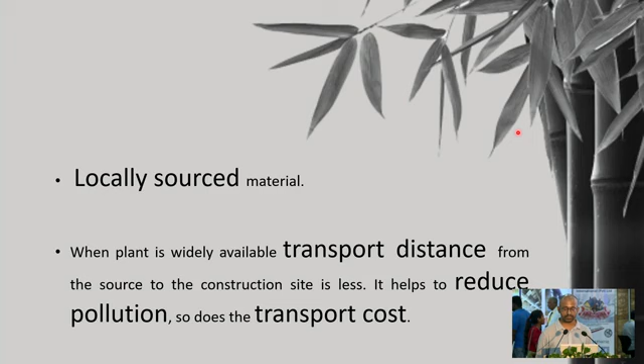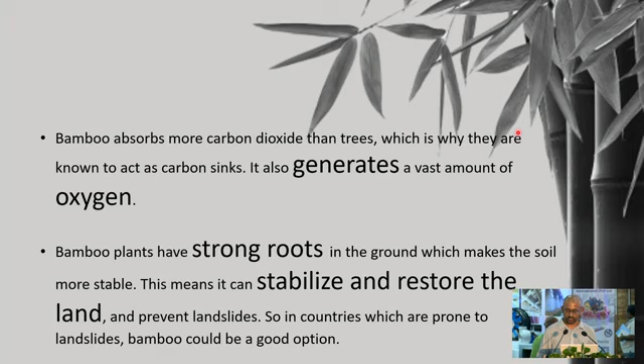And the plant grows naturally. So anyone can grow it. It doesn't need pesticides or any complicated chemicals or anything. So anyone can understand the process. It's locally sourced. You don't have to import the material from other countries, which makes it a very green material. And because transport distance is less, the cost is also less, and also the pollution is less. It also generates a lot of oxygen. It absorbs carbon more than other trees, so it acts as a carbon sink as well. And with the strong roots, it's good to stabilize soil and restore the land. So it's good to grow in landslide-prone areas as well.

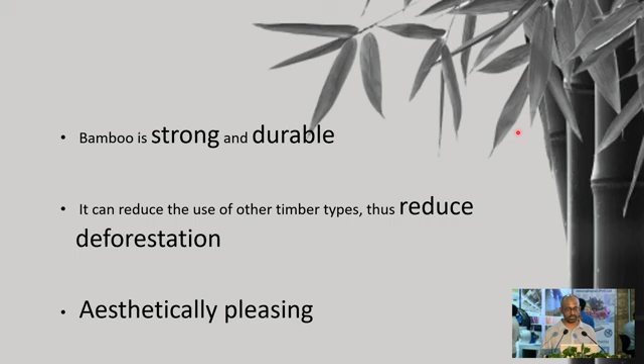It's strong and durable. When we use bamboo, we don't have to cut other valuable trees. So it can eventually reduce deforestation. And buildings in bamboo are quite different from other buildings, so it's aesthetically pleasing. The construction techniques can be easily learned. We already have good climatic conditions in our country to grow bamboo. So there is potential to grow this as an industry.

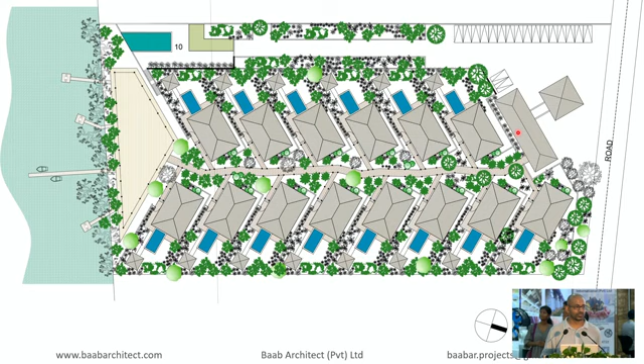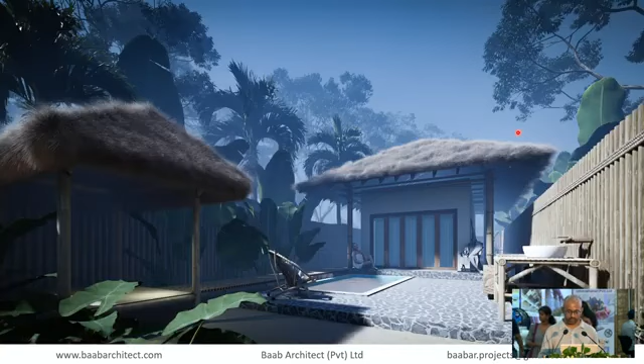So this is a bamboo hotel I got in 2017, and it was a 14 chalet project in Trincomalee. We designed the project and we proposed the building to be constructed out of bamboo, but the project never realized. But from there, even though we proposed bamboo, I didn't know bamboo construction, so I wanted to learn bamboo, and I looked for professionals to learn about bamboo, and I hardly found anyone from Sri Lanka. So I went to Bali in 2018 to learn bamboo for 10 days. And again, this is the chalet, and some 3D images of the same project.

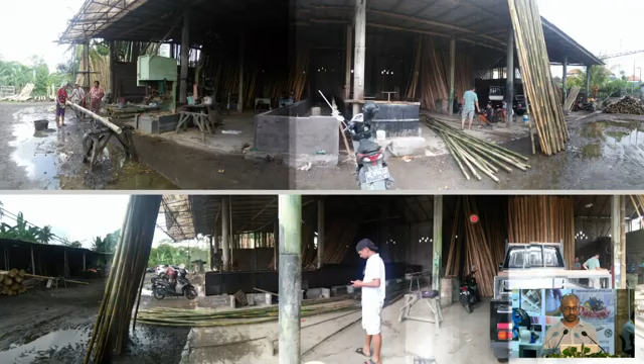And this is a treatment plant. It's not very complicated. It's just a simple shed with 2 tanks. You have a masonry tank and a steel tank. In the masonry tank, you keep the bamboo for about 1 or 2 weeks, 1.5 weeks sometimes, and you add boric acid mixed with water. You just sink the bamboo and keep it. It's very simple. After that, you put it into the steel tank and heat it up for about 3 hours. And that's it. After that, the termites won't attack. It's safe. The glucose is toxic, so the termites won't come. So you can use it for construction.

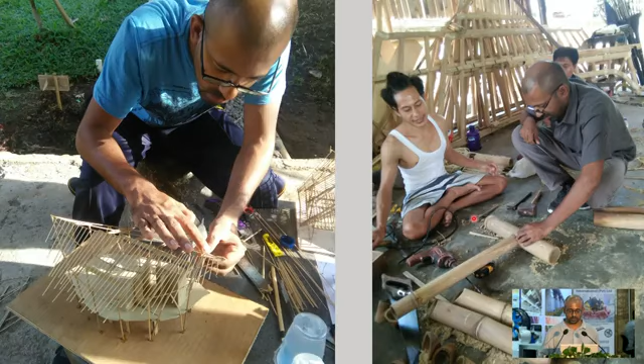So these are some workshops, and bamboo model making is also very important for architecture students and architects. It's very important to work with models if you do bamboo construction, because they hardly use drawings at site. They always use the model. There's a model they keep at site. They have a small ruler made out of bamboo itself. They take measurements from the model and do the construction. So having a model is very important.

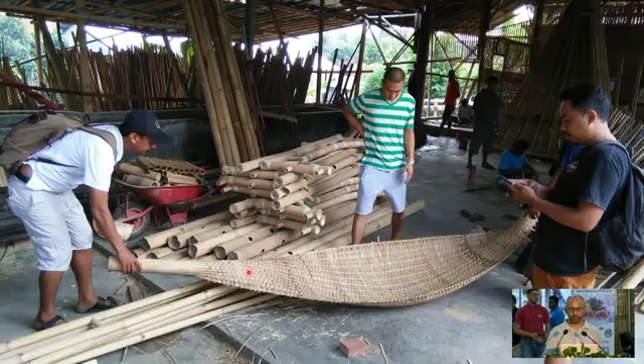Even design development happens during model making. It can start with the sketch, but the design development always has to happen in a model. This is again another workshop. There are lots of building elements they sometimes do at workshops and then bring to site and assemble. So this is an example. This is part of the roof. I think you see the cursor. Yeah, it's part of the roof. You can transport it to the site and then assemble it there.

And this is again, they call it alang alang. In Sri Lanka we call it mana. So it's widely available, not very expensive. So that's a way of treating these. So if you do it right, you can really use it, and if you do it really well, you can even keep a building for at least 30 years.

So after returning from Bali, learning bamboo in Bali, we did a small structure in Kandy. So we cut bamboo. This type we cut was asper. We have three main types good for construction in Sri Lanka. Worldwide, there are about 1,500 species, but in Sri Lanka, there are about 3 species. So we found asper from the village. Asper is the scientific name. It's Dendrocalamus asper. We also call it green bamboo, but there are other green bamboo as well. This particular type is asper.

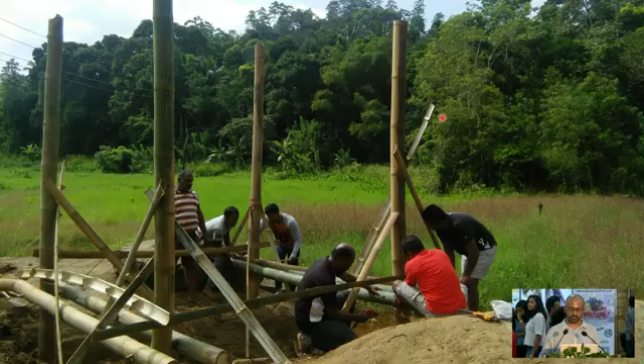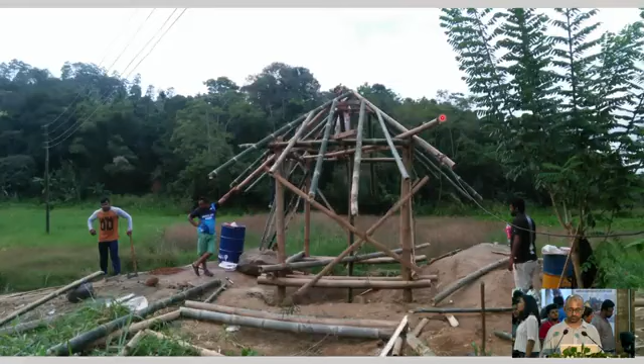So we cut some asper, brought it to the paddy field. There was an open ground in one of my friend's places. And we assembled it there as a very basic structure. We didn't treat the bamboo, by the way, but we followed the construction techniques I learned, for me to understand what this whole thing is, and also to share the knowledge with the locals. So it looks like a very primitive structure, but it was a great start. It was a success, I must say.

And in the next few slides, I would like to introduce, starting from there, I started talking about this material, and I found out that there are other architects, designers and professionals also working with bamboo. This is very challenging because only very few people work with bamboo in Sri Lanka. To introduce bamboo to our industry is quite challenging because we don't have a lot of skilled labor mainly, and also we don't have the infrastructure. We don't have treatment plants, designers, the knowledge. So we have to gather the few people we already have, and team up to share our knowledge with others.

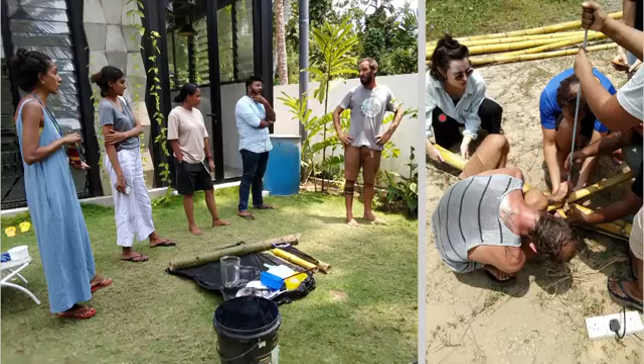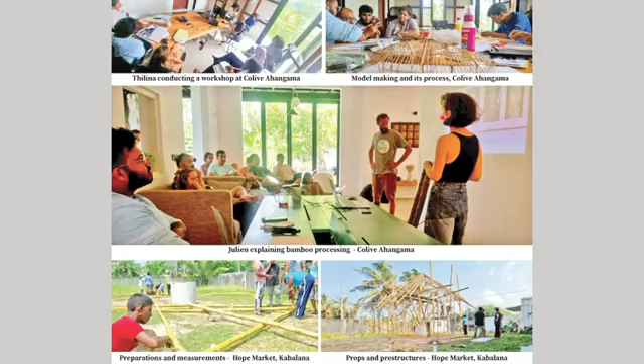So again, Anurangi and Ismail recently went to Barcelona and did a workshop there, bamboo model making and some other Sri Lankan crafts. So it's very interesting. It's very nice to see these happening now quite constantly.

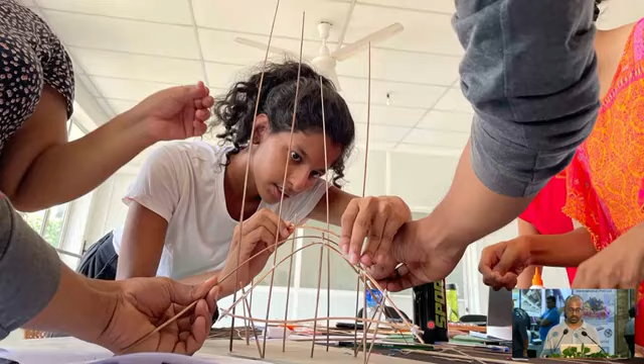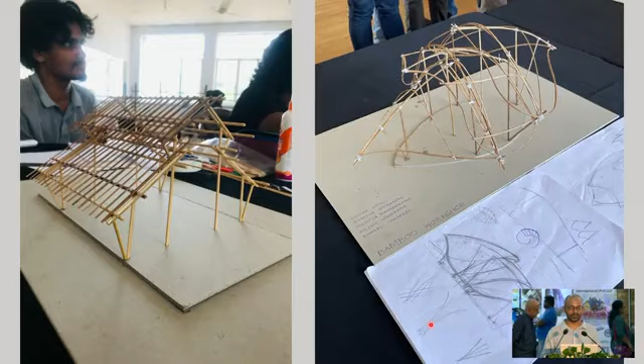So after Ahangama, we also had a bamboo model making workshop in Borella. Pasanga Abewardhana Designs Private Limited organized the workshop, and I was invited as the instructor, and architect Nadika Jayavira also came with students from Moratuwa University. So we had a very good session there as well. The students were very enthusiastic and very good. They asked questions and learned a lot. So it went really well.

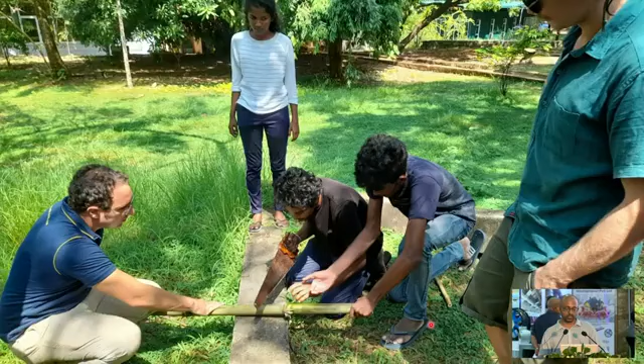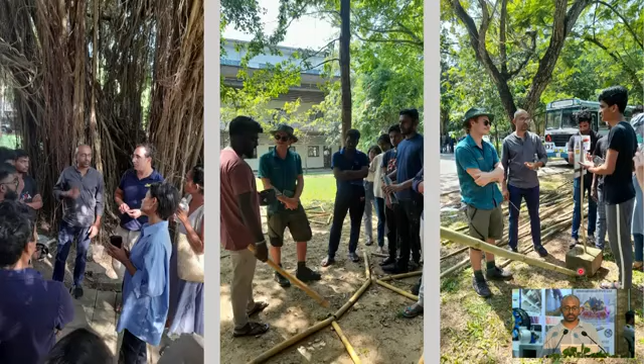And after that, we also had a structures project, first year, Moratuwa University, we had a workshop there. For that also some professionals were invited. This is Ismail, and this is Freddy, another bamboo expert working in Sri Lanka. The students were asked to try out different structural systems. These are walls and domes and tensile structures, and this is a truss system. If you go past Moratuwa University, you will see this structure. Other structures are inside the university. So this is a dome structure.

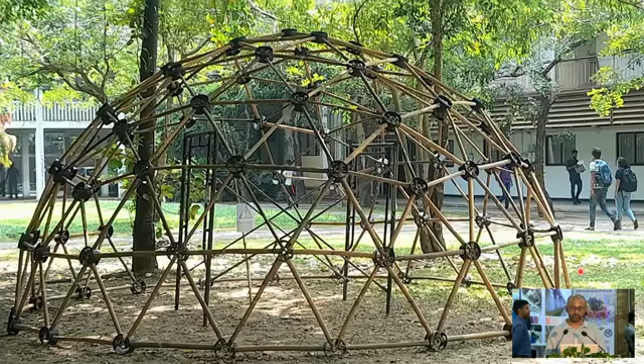It went really, really well. So students learned quite a lot. And even the lecturers were very helpful. We had a good team there working.

So after that, we even started internships. With the same architect I worked with, Moratuwa University sent 5 students. They are currently working in Bali. These are Nileshi, Nilisha, Anjana, Nirasha, Deshapriya. They are currently working in Bali. They are coming back mid-March.

So we somehow managed to send some students, and this is only the start. We'll be sending more students, and even professionals, whoever likes to learn, we can send you guys to Bali if you like to learn. And locally, we are organizing workshops. When the students come back, they are coming back with some good knowledge. So we are hoping to share that knowledge through workshops.

This is architect Noora and Richard. They are the architects who did the bamboo restaurant in Ella. It's called Ravana Pool Club, I think. So these are the 2 architects, Richard and Noora. They are the architects, and these are students. And this is architect Chico's office.

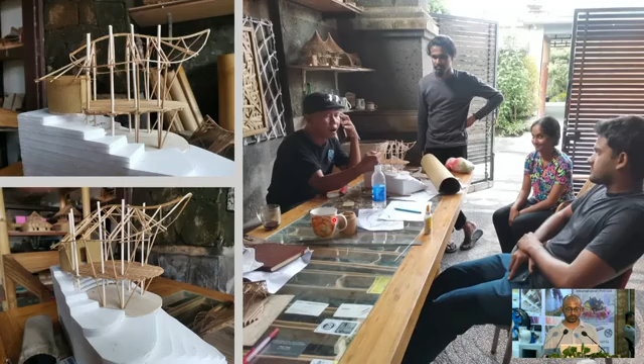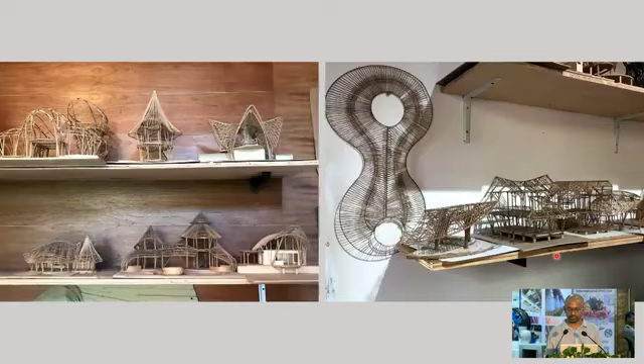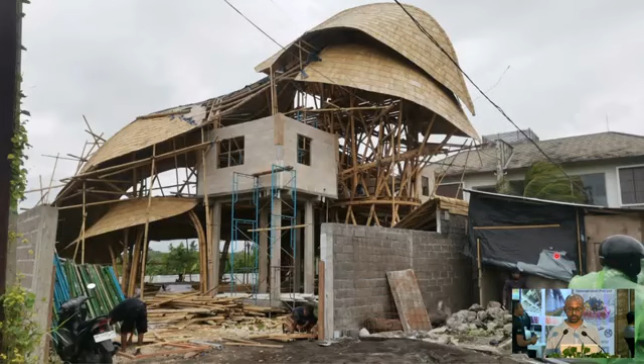This is Chico in the middle. And this is his studio space. They have a lot of projects in Bali. This is a residential, it's more like a holiday bungalow. It's being built. So these are some pictures our students sent me, and this.

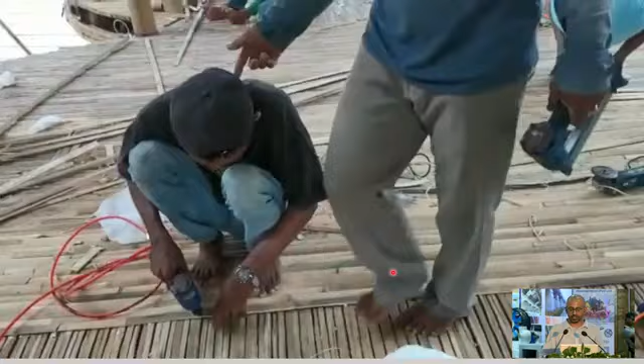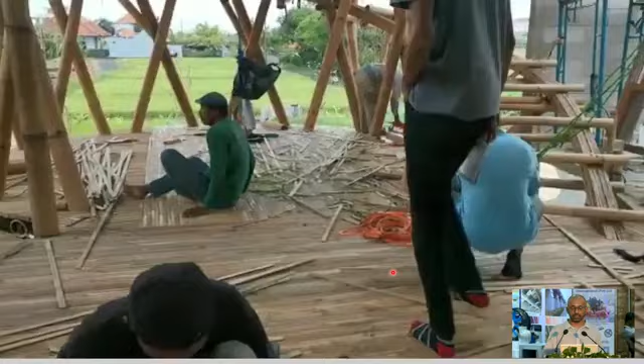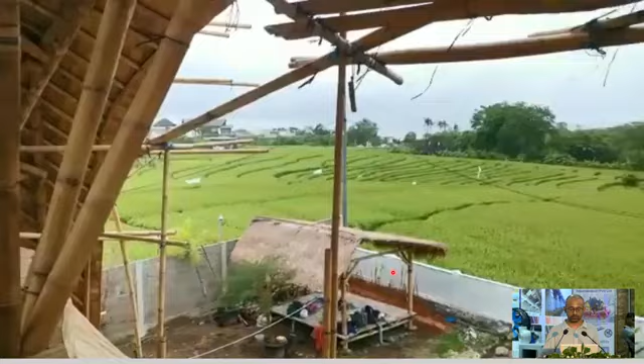Let me show you the video also, so that you get some idea about how a construction site looks like. They are doing a bamboo floor. This is at an upper level, so you can go 2 stories and even 3 stories, and sometimes even 4 stories. In this design, they have combined typical masonry construction with bamboo construction. Yeah.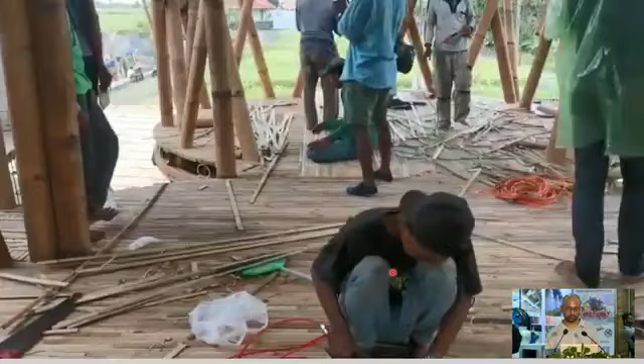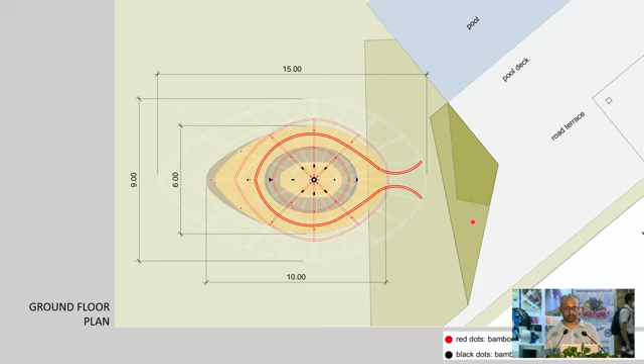There are some other projects I'm also involved in, and these are 2 architects who are working on a project in Kandy. Architect Lisa, she's a German architect, and she's collaborating with architect Nath Rankotge, and I was asked to come and help overlook the construction of the project. It's Arunya Nature Resort and Spa in Kandy. It's the bar area basically. So this is the plan, and this is the section.

It's a very sculptural, small building, I must say. So having the curvy roofs is quite challenging, but it can be done. This is the first time I'm also trying out a curvy roof.

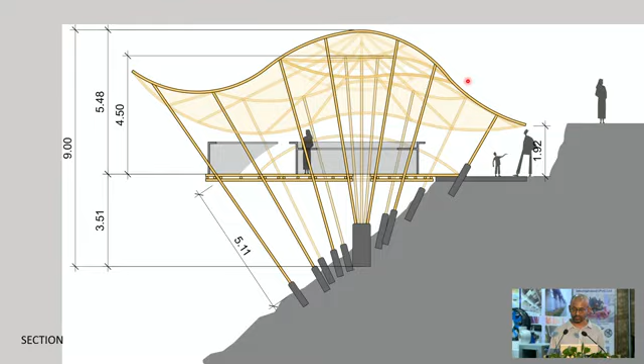So this is Julian and Aoife. They have an establishment called Una Bamboo in Ahangama. They also have a treatment plant, and they are building an eco hotel there. They built their first structure during a workshop, and they are continuing building the rest of the structures. And you can check them online. Unfortunately, I don't have any pictures of the structure.

Okay. And this is our very own Andaka Jayasinghe. He is also very interested in bamboo architecture. And this is one of his designs he had designed some time back.

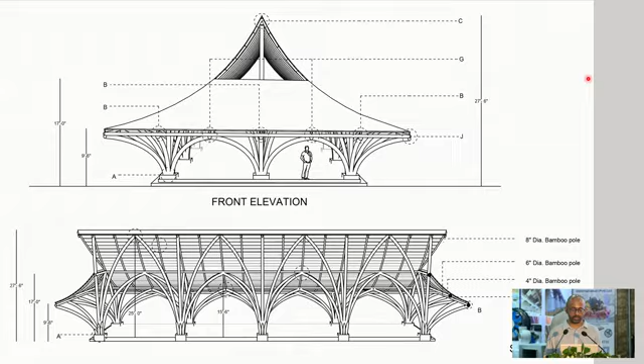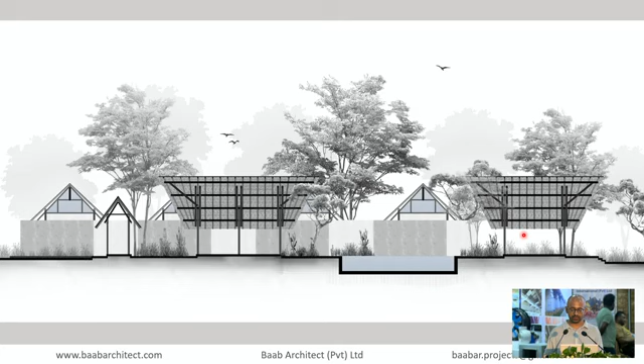This is a project we are doing. I'm collaborating with architect Mutiara Tiger, and it's a holiday bungalow. This is the layout. Phase 1 is 4 chalets and the dining, living, and service areas. And phase 2 will be a few more chalets. This is the section. These are some 3D images.

So, like I said, doing curvy structures is quite challenging. So we thought we'll stick to straight columns and truss systems. By the way, this is the first project we actually started last year. Last year in November we started construction. Since it's the first design, first construction project, we thought not to have any curvy structures.

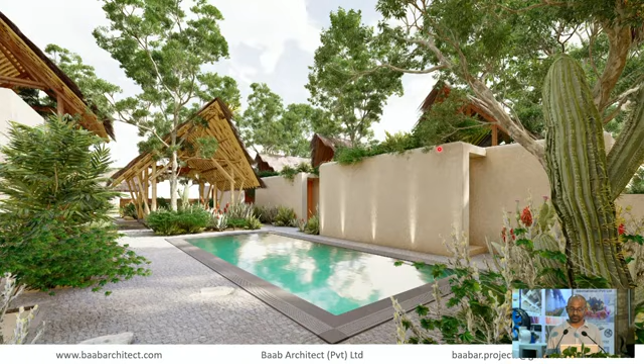The roof structure form is very typical, but we are using bamboo. Some of the areas are masonry, but most of the areas are done in bamboo. This is the living and outdoor barbecue area. These are the chalets.

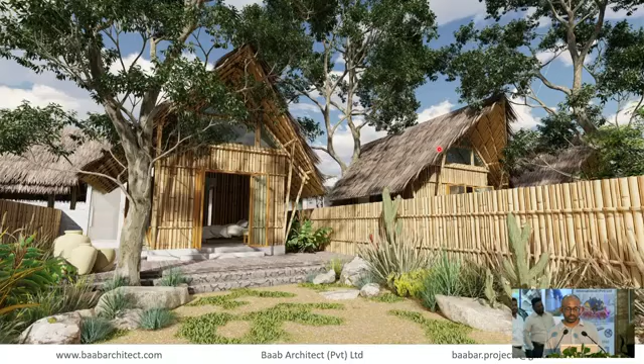And like I said, we are doing some workshops and hoping to do one hopefully end of March. And we are hoping to collaborate with Srinba as well. Srinba, some people might know, is a network for bamboo and rattan. It's quite the place to go if you want to learn about bamboo.

I'm also a member of Srinba, and there are lots of other professionals and craftsmen. Lots of people joined Srinba. So we are hoping to collaborate with Srinba to do the workshops. So this is our team, a very small team, but very efficient. So it's nice to introduce ourselves as well.